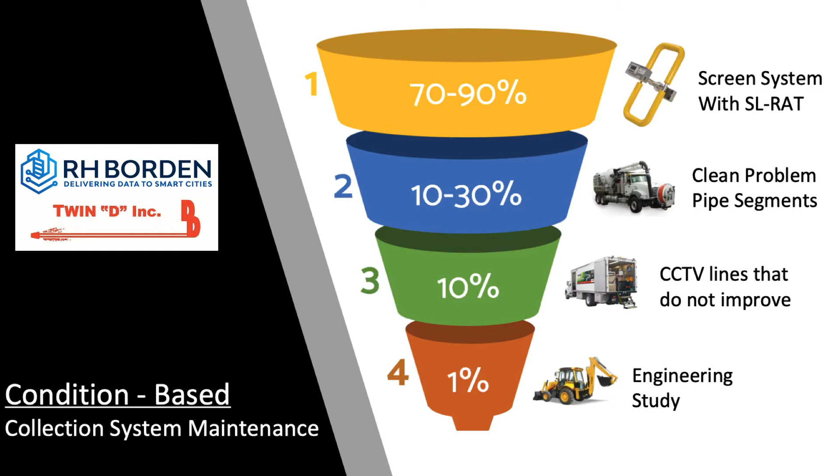This graphic shows a funnel. It's a funnel of focus. We're going to come back to this, but I just want you to have this in mind, is that what we're bringing today is an idea of big picture down to little picture.

So let me ask you, what is your current cycle of system maintenance for the sewer lines? Well, we do emergency calls, obviously, are the top priority when those occur. And we try to assess a quarter of the system every year.

Okay. That sounds about the way things go for a lot of towns and cities, is where we see that a portion of the city is getting a lot of attention one year, and then another year another section of town gets attention, and they just work through it. Yeah, and we have that one section with all the restaurants. We do that one every year.

That makes sense. So you have areas that you want to focus on, and those are known quantities, and you're always going to hit those because we know they're going to have problems. You may have that corner of the park with roots coming in from that big old oak tree, and that's one thing you want to maintain on a more frequent level. But in general, you're working towards this idea of dividing up the town into quadrants in your case, and working your way through each one a year at a time, just to make sure things are working properly. Makes sense. That's the way most are doing it.

So we select a neighborhood, we deploy some resources, and that allows us to feel more confident in our maintenance.

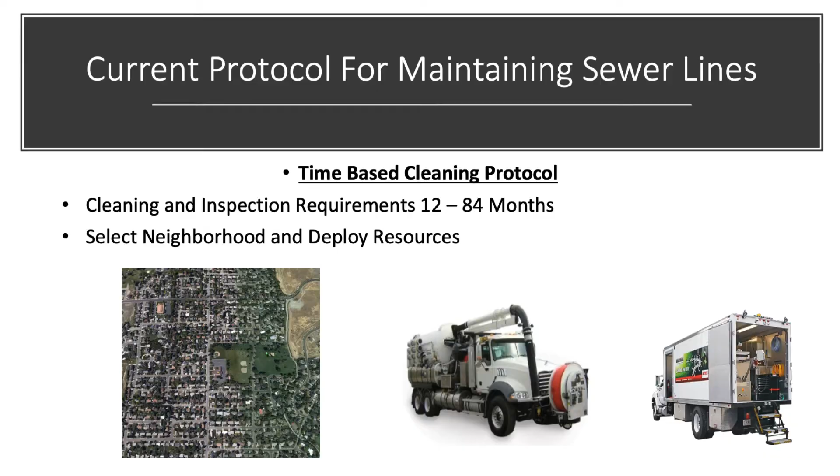We've identified some issues with the time-based protocol. One is we're cleaning every pipe segment regardless of condition. That just means we run the jet trucks and get them cleaned because we just want clear knowledge that we've done it. Coupled with that is that we're just not looking at every pipe segment every year. We're looking at a fourth of it in your case, and we're working our way through town. And that's fine because those are the resource limitations we have.

Another thing we've noticed is that pipe flow isn't necessarily quantified. It's either on or off, basically. We've cleaned it or we haven't. It's flowing or it isn't.

And then the last thing is this idea of floaters. Floaters are the risks that are inherent in any system, and they happen at a moment's notice in odd places. We're not sure where they're going to happen, but they do. And if we're waiting for floaters to tell us where to go, it could be maybe 3-4 years out. So we've got this brewing problem that will come and bite us when we're least expecting it, because we're not looking at all the system all the time.

So most cities are using this time-based protocol we've just discussed, and we want to transition to this idea of a condition-based protocol. RH Borden wants to be that little blue arrow, the bridge from time-based to condition-based.

But for condition-based to be effective, we need to have information about the condition of a pipe. So what do you mean by condition-based? Let me give you an example of condition-based versus time-based.

So time-based: back in the day when I started driving, I was told every 6 months to change my oil, which was good advice for the old car I was driving. That made the engine last a long time. But now I drive a newer car, and it has a sensor that says change your oil now. That's information given to me by a piece of technology within the engine telling me to do something. So that's a complete shift from time-based, meaning every 6 months I'm changing my oil, to now waiting for a light or sensor to tell me to do something.

So that's the concept of condition-based monitoring. What that requires is information, and if we can get that information, then we can choose to change our activities. So there is now a sensor, a device that will help us understand when we need to perform a function.

Introducing the SLRAT, an acronym for Sewer Line Rapid Assessment Tool. It was developed back in 2008 in the city of Charlotte, North Carolina. The public works people there were overwhelmed by their collection system. They had SSOs right, left, up, and down. They were behind, and it got so bad that the EPA got involved and said, time out, you got to do something.

So they went to the University of North Carolina in Charlotte and met a gentleman named Ivan Howitt, an engineering professor of acoustics and electronics. These two things together were a great fit for the problems they were facing. Ivan understood the circumstances and developed this tool based on his knowledge. The tool is basically a device that measures blockages in sewer lines using transmissive acoustic technology. It was so successful that the EPA has written an extensive paper about it, how it works, and its effectiveness. It's being used by hundreds of utilities around the world, has ASTM standards and patents, and the veracity of the technology has been proven over time.

The SLRAT is lightweight. It can go in backyards, it can go on back roads, it can go a number of different places that perhaps a cleaning truck couldn't go.

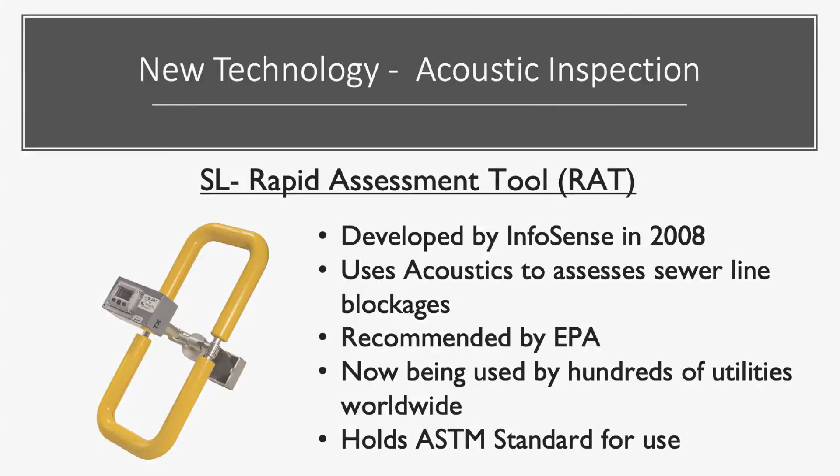The way they're used, as you can see with this slide, is that they're set up from manhole to manhole. There's a transmitter and a receiver that go on consecutive manholes, and they operate together. The transmitter sends out a signal, an audio signal, a series of tones that you can actually hear, which the receiver listens for with a very sophisticated and specially tuned microphone. That activity happens in about 80 seconds.

What the receiver is doing is listening for sound degradation. The sound degradation allows us to understand the flowability of the pipe and gives us a score related directly to the amount of obstruction. We basically leapfrog through a system, manhole to manhole, collecting this information as we go.

Now, there's a little more to the SLRAT than just sound. There's a lot of technology built into those devices. Between each manhole, they're talking to one another with a radio, and they're able to sense the distance apart between each device. So one's saying, hey, I'm 350 feet away, and the other one's saying, yeah, you are. So we now know the pipe length based on the radios that are in the SLRAT.

They're also GPS enabled, which enables us to have a whole bunch of data come back at the end of the day. We get a timestamp, a date stamp, the operator, GPS data, and most importantly, the flowability of the pipe. All this is collected electronically, so we're not standing around with clipboards writing stuff down. It's all just built into the system.

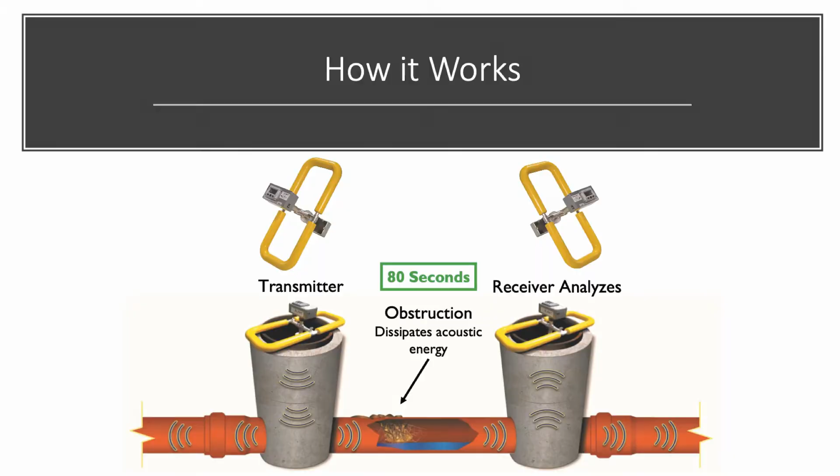72% of the pipes that the InfoSense SLRAT has assessed over its lifetime, which is over 100 million feet of pipe, is in good shape. And that begs the question, is 72% of our effort being wasted? Is 72% of the water being wasted? Is 72% of the fuel in our trucks being wasted? The answer, unfortunately, is probably yes.

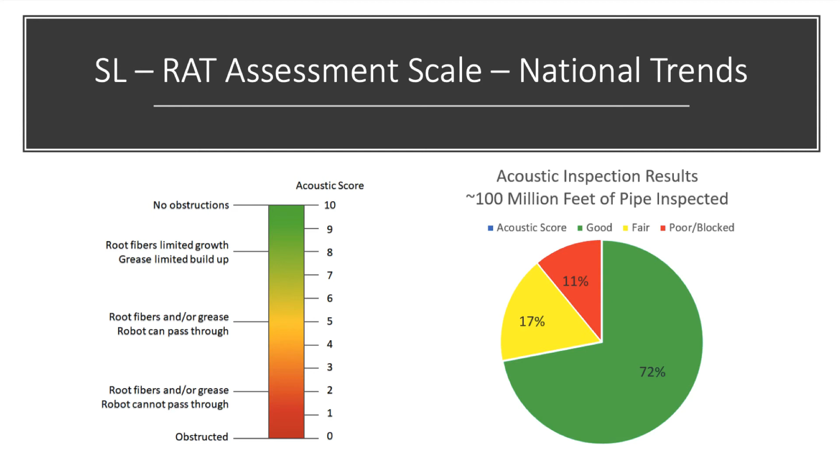But the good news is that we now know there's 11% that needs to be addressed, and with the maps that are generated, we know where. That's one of the great things about the SLRAT, the mapping capabilities. At the end of the day, we upload the data collected from the SLRAT tool into a secure website, a database that quantifies all the activities that happen during the day. We get the time, the date, the GPS location, and most importantly, the flowability of the pipe. All of that is collected and can be exported into a map.

Okay, so I'm looking at a map like this, and our city has added 6 subdivisions. How's that going to work? Sounds like you've got a lot of pressure to keep track of new growth.

Well, that's one of the great things about the SLRAT, as we're collecting data about the existing system, we can go and collect data for new parts of the system as well. So we could be the beginning point, or the data from the SLRAT could be the beginning point. The great thing is it's real time, so you would have information about that new area of town, those new subdivisions, and be able to decide, are we going to spend time with that or not? That's the great thing about data collection, it can expand and grow probably faster than in other areas of the city.

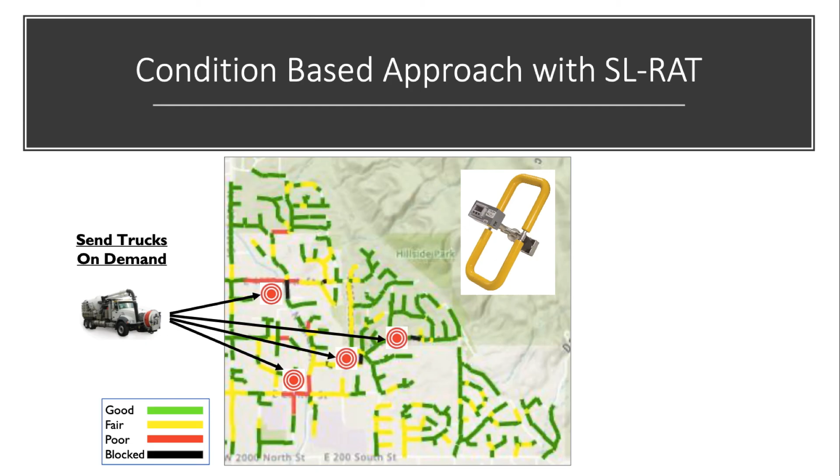As that activity happens, some things get revealed. Sometimes a little bit of root comes back with the cleaning, or sometimes extra soil comes back, and other problems get identified. With that information, we can send in the CCTV cameras to get a visual understanding of what's going on in that particular pipe. Once we have the CCTV videos, we can do more analysis and decide whether we want to send in an engineering study, or bring in a contractor to relay a pipe or fix an offset joint or something of that nature.